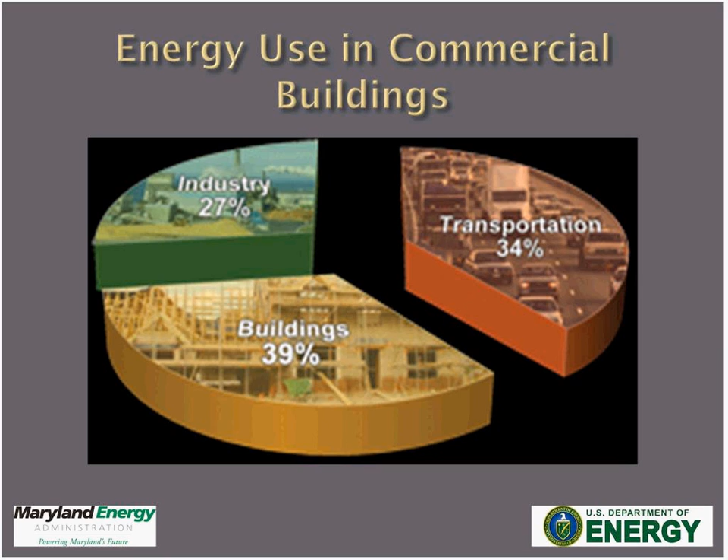Maryland adopted the 2012 IECC as state law in January of 2012. Local jurisdictions were required to begin enforcement of the 2012 IECC by July of 2012. This focuses on details needed to comply with the state law and the energy code. Buildings are the largest sector for energy consumption in the United States. As you see, 39% of energy use is associated with commercial buildings. And in buildings, energy is the largest expense to maintain and operate the building, with a 30% share of the building's energy consumption.

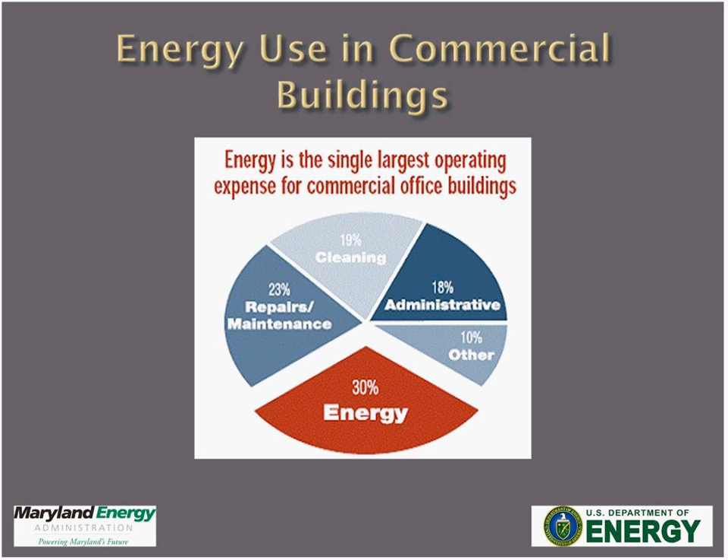In the commercial realm, the building is commonly bid, built, and tested according to the set of instructions given to the general contractor. These instructions are usually in the form of drawings, specifications, and addenda created both in the design and bidding phases of a commercial project. This is the blueprint from which everything in the structure is described in sufficient detail to be built accordingly. The better the documentation, the smoother the construction, and the higher the probability of compliance with the energy code.

Inspections for the energy code can and have been allocated to design professionals administrating the construction project in some counties, as these professionals will generally be on site much more often than a code official. In this type of arrangement, an affidavit at the end of the project is provided to demonstrate compliance with the construction documentation and the energy code throughout the construction process.

In order to demonstrate compliance, documentation can be in the form of any of the following. It can be all drawing documentation. It can be supplemented by specification books or project manuals. Additional forms and checklists may be necessary, such as COMcheck reports and checklists, or performance-based software compliance reports and checklists. Some jurisdictions require beyond code compliance and include these checklists and forms. These may be LEED or Green Globes, just to name a few.

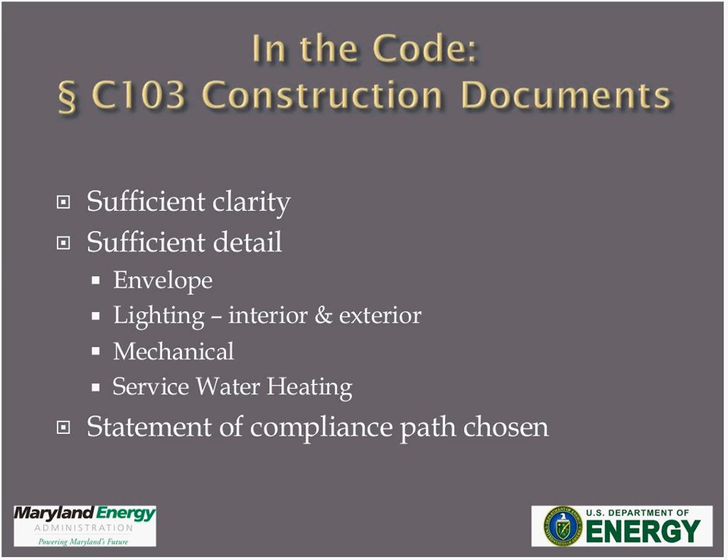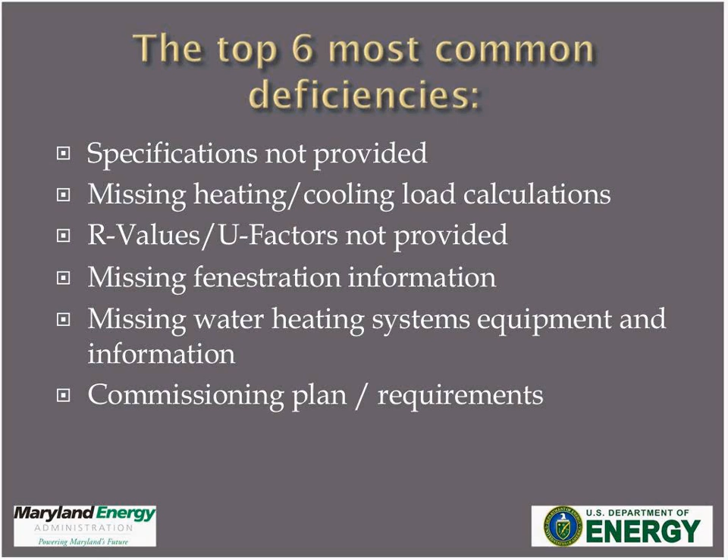You can see the top 6 most common code-related document deficiencies. Usually specifications are not provided, heating and cooling load calcs are missing, R-values or U-factors are not provided, fenestration information is missed, water heating systems equipment and information, and commissioning plan and requirements are generally not provided on the documents.

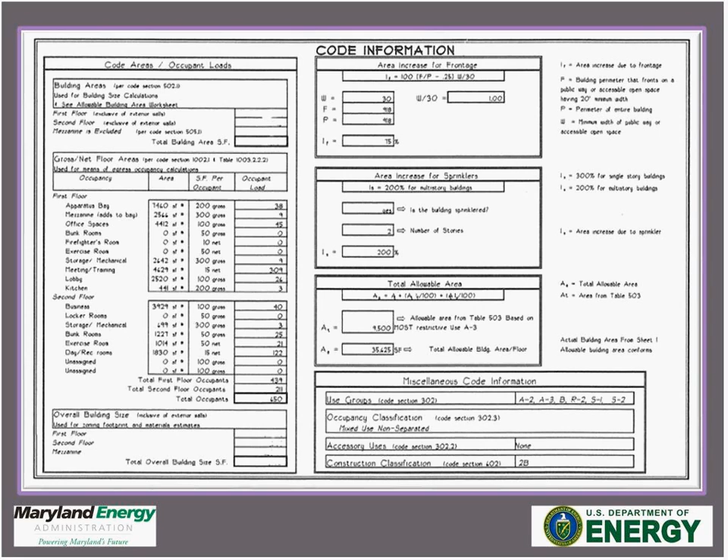Code information, typically life safety and egress information, is included in the code compliance sheets usually found at the beginning of the set of construction documents. Generally, energy-related code items are not included on this sheet. Additional information regarding energy should be added to energy code review sheets. This should include compliance path chosen, insulation levels, U-factors, solar heat gain coefficients, narratives on mechanical controls, lighting controls, and commissioning plan as well. Here is a very simple example of one building that used this table to demonstrate compliance with many of the building thermal envelope requirements following the prescriptive path.

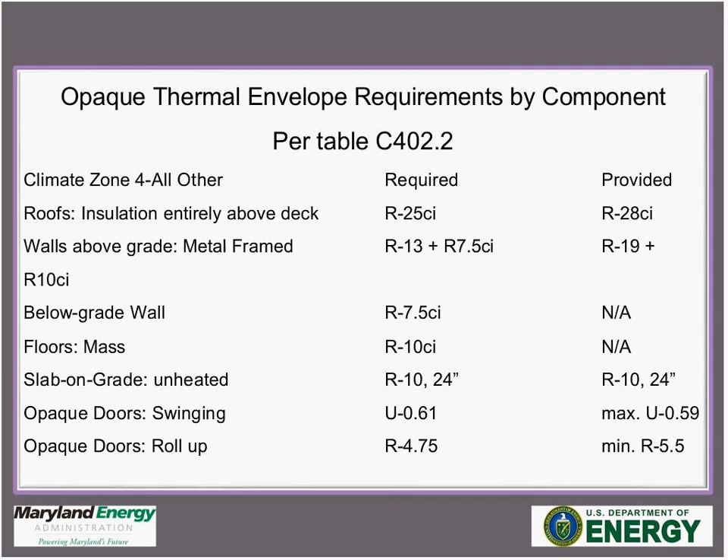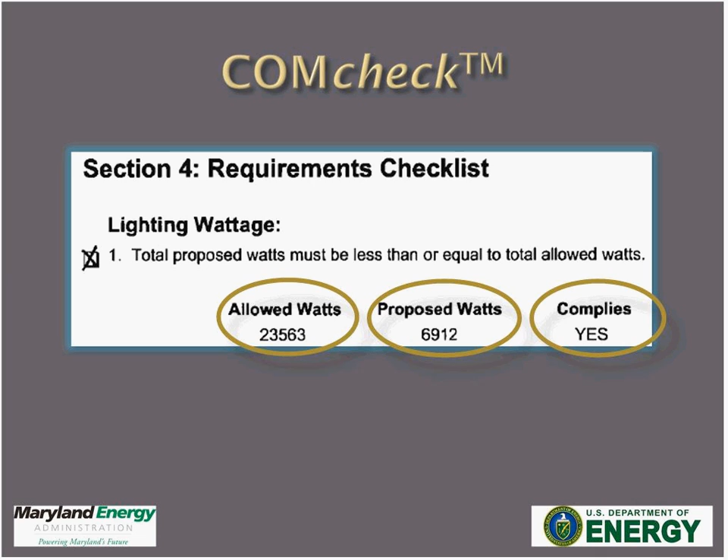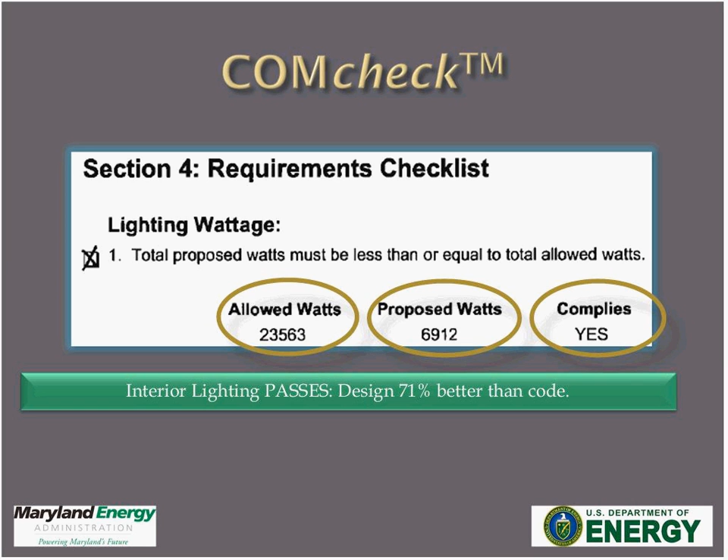COMcheck quickly and easily demonstrates compliance and makes the job of the plan reviewer that much easier. The professionals should expect the plan reviewer to still be verifying whether the information on the COMcheck reports coincides with the information that is elsewhere in the drawings and specifications.

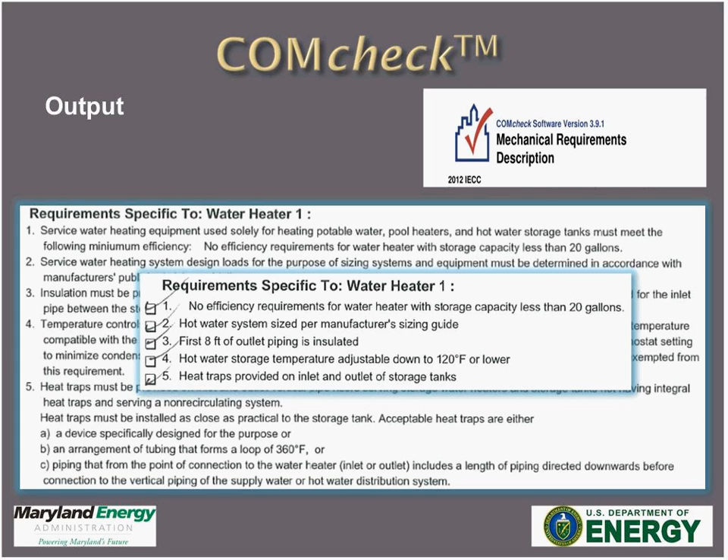Yes, these rarely are incorporated into the actual documentation that is used to construct the building, but the practice of including these actual reports and checklists in the drawing set is starting to become more and more prevalent. This actually is a very good practice to get into as it helps to demonstrate energy compliance to the code official.

HVAC has many requirements in the new code, some of which are mandatory and some of which are very nuanced, with if the building does this or the occupancy is that, then the mechanical system shall do this or include that. There are two paths for HVAC compliance, either simple systems or complex systems. Many commercial projects fall under the complex system requirements. Let's take a look at some of the mandatory provisions.

Heating, cooling, load calcs, equipment system sizing, AC equipment performance, controls, ventilation, ERV requirements, and note the picture illustrating the controls by zone above.

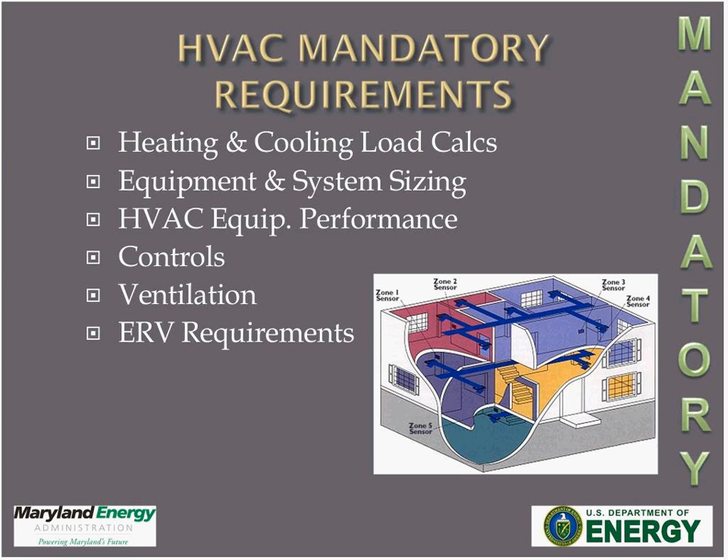Mandatory requirements include duct and plenum insulation and sealing, piping insulation, systems commissioning, air system design and control, and outdoor heating. Most see commissioning solely as testing during the end of the construction phase. However, commissioning is in fact a collaborative process for planning, delivering, and operating buildings that work as intended.

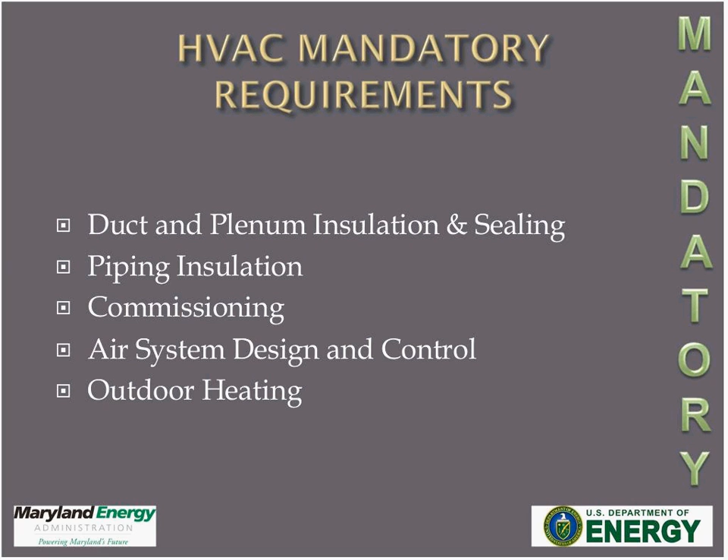ASHRAE defines commissioning as the process of ensuring that systems are designed, installed, functionally tested, and capable of being operated and maintained to perform in conformity with the design intent. Commissioning begins with planning and includes design, construction startup, acceptance training, and can be applied throughout the life of the building. Commissioning encompasses a holistic approach to building design through construction and beyond into facilities management and maintenance.

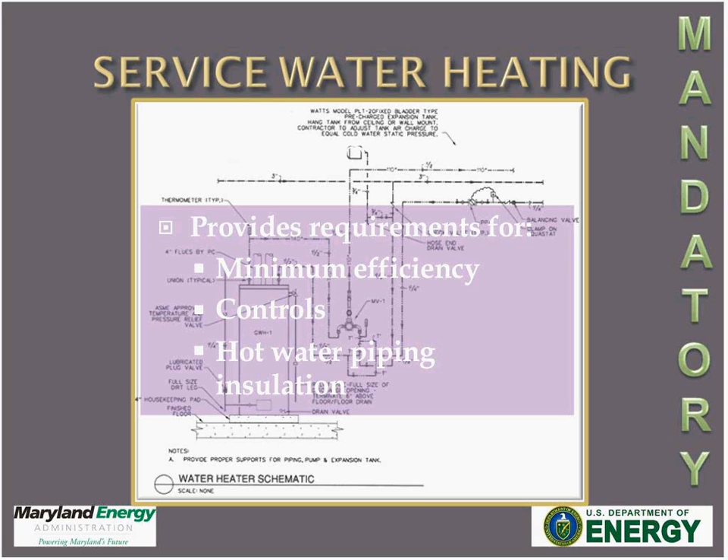Service water heating does not have a tab within COMcheck, so it must be described elsewhere in documentation. Design professionals need to clearly demonstrate compliance with minimum efficiencies for service water heating equipment, and many times this can be accomplished by simply adding a column or two to the service water heating equipment schedule. Control the equipment as well as state where hot water piping insulation is to be installed and to what level R-values the insulation on the pipes needs to be.

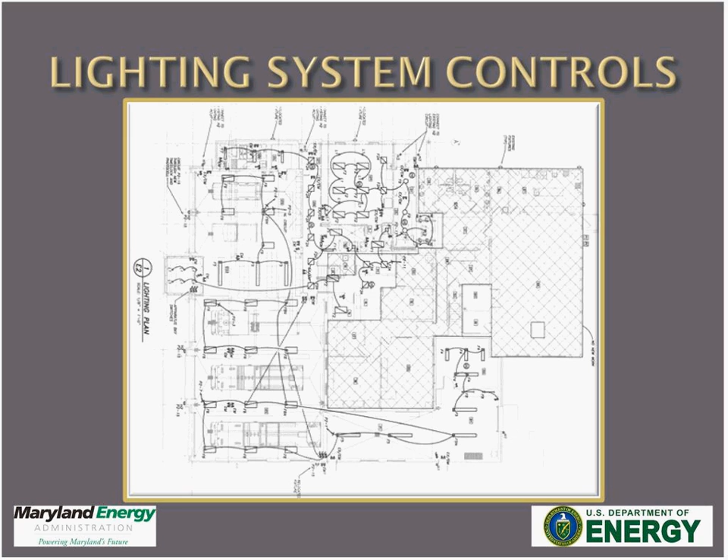For power and lighting systems, design professionals need to describe compliance with electric energy consumption, condition of ballasts, maximum lighting power for interior applications, minimum acceptable exterior lighting equipment, and systems controls. Here's an example of some of the lighting controls as documented on the drawings. This plan clearly shows switching and wiring of devices.

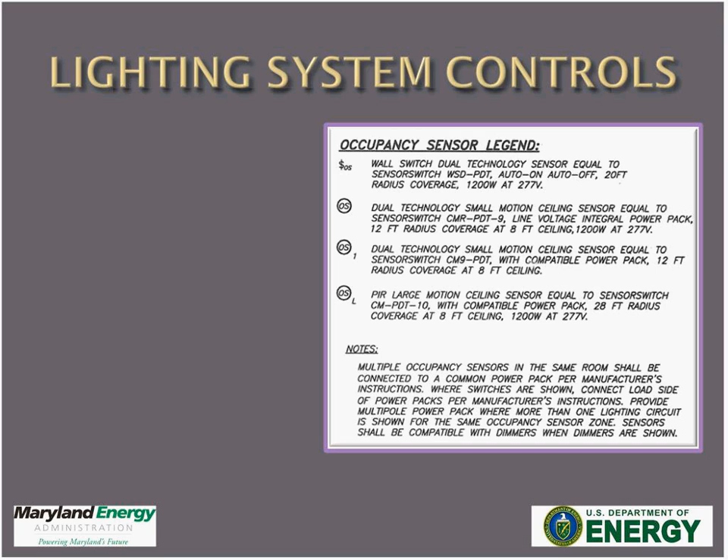Elsewhere on the lighting plan sheet are notes also helping to show compliance with lighting systems controls in the energy code. Of course, there are many options with which to convey the required information. Finally, to reiterate: graphic information on drawings, textual information on drawings, descriptive and/or performance information in the spec book, COMcheck or other approved software to help demonstrate compliance.

And again, in the building realm, the building is commonly bid, built, and tested according to the set of instructions given to the general contractor. These instructions are usually in the form of drawings, specifications, and addenda created both in the design and building phases of a commercial project. This is the blueprint from which everything in the structure is described in sufficient detail to be built accordingly. The better the documentation, the smoother the construction, and the higher probability of compliance with the Energy Code.

Inspections for the Energy Code have been allocated to design professionals administering the construction project in some counties, as these professionals will generally be on site much more often than a code official. In this arrangement, an affidavit at the end of the project is provided to demonstrate compliance with construction documentation and the Energy Code throughout the construction process.

Thanks for joining me on this webinar on plan review and documentation for commercial building compliance with 2012 IECC, Maryland's new Energy Code.